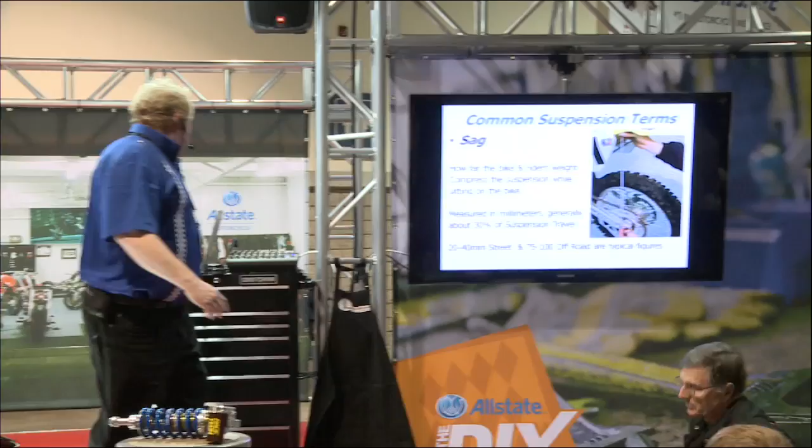Mercy. All right, so I get on the thing, it's got twice as much sag as it wants. How do I adjust it? Sag is tuned using what we call preload. Now, preload is the force we're putting on the spring. In other words, how much are we squeezing the spring?

Now, shock absorbers will have some sort of easily accessible external preload adjustment. A high-performance shock absorber like this typically has a threaded collar, so I can make very small, fine adjustments. A lot of your street bikes will have a ramped collar that has a little cam-type mechanism with anywhere from 3 to 7 notches. Click, click, click. A little easier to do, but a much more coarse adjustment.

What you're going to find is pretty much every motorcycle made is going to have a preload adjustment, even a little 250cc commuter bike. So why would they give a little basic bike like that adjustment? You got to think about where the weight is. Where's the rider sit? Well, towards the back of the bike, middle of the rear. Where are passengers, loads, and anything else you add to this bike going to go? Saddlebags, duffel bags, rider on the back. At or behind the rear axle, a lot of leverage going on here. So I have to have provision to adjust that on pretty much any kind of bike.

Now, forks are a little bit tougher. A fork may or may not have an external adjuster. Your sport bike forks and some of your sport touring bikes will have some sort of knob or nut up here to turn to tension the spring inside there, but most don't, like this example here. And I'll show you a picture of this later on, but if I don't have an external way to tune preload, I have to take the cap off and alter the length of a spacer inside here or add one to it. Sometimes it's just sliding a few washers inside there, sometimes it's cutting a piece of aluminum or PVC pipe to set that distance inside there.

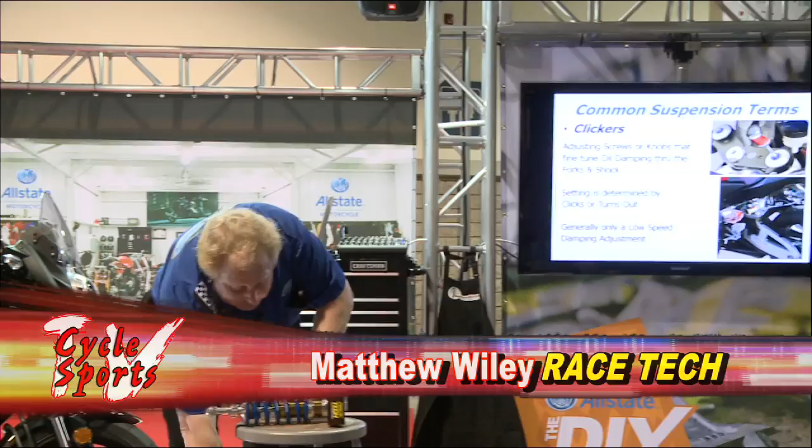If we want to adjust the damping on our bike, we might have the opportunity to do this by virtue of what we call clickers. Clickers are a term that we've tagged on to external adjusters that may or may not be found on your forks or shocks. So in my first picture there, I got a picture of a fork, and we've got a screwdriver adjusting a little screw on the top middle of the fork. Screws on the top of the forks, rule of thumb, are for a rebound damping adjustment. So it's controlling how quickly that fork re-extends.

Screws on the bottom of the fork will be somewhere near the axle. Could be on the front or side, sometimes, or even in the bottom, like this one is, a little screw on the bottom there. And if you got a Ducati, a lot of times they're in the bottom, and Ducati put a little hole in the axle so you get a screwdriver up in here that the guy at the shop forgot to line up. Be aware of that. Okay, so adjusters at the top, rebound, adjusters at the bottom, compression. Remember, the stiffer the spring is, the more energy it's going to store and release, and the more damping I potentially need to control it.

Now, this particular fork picture, this example has an external preload adjuster. The blue nut underneath that screw, you put a wrench on that and crank it down, and there's a threaded mechanism there that pushes on the spring to adjust the preload. Now, shock absorbers, we have the same basic adjusters, but just to make sure you're aggravated, intimidated, and somewhat pissed off, they're backwards. On a shock absorber, the adjuster at the bottom will be the rebound damping adjuster, and the adjusters at the top will be compression.

And you're saying, well, that's fine, Matt, but how do I know which is top and bottom on my shock? Okay, if the shock has a reservoir like this one does, the reservoir will be at the top. But not all shocks have reservoirs, a lot of them don't. If there is no reservoir present, the body of the shock absorber is considered the top, and the shaft is considered the bottom. Now, I bring this up because shocks can be mounted upside down. This particular example was a Race Tech shock for a Honda ST1100, big touring bike. And for ease of access, and because we've added a reservoir that the stock shock doesn't have, we mount this particular shock upside down. So you need to be aware of the orientation of it.

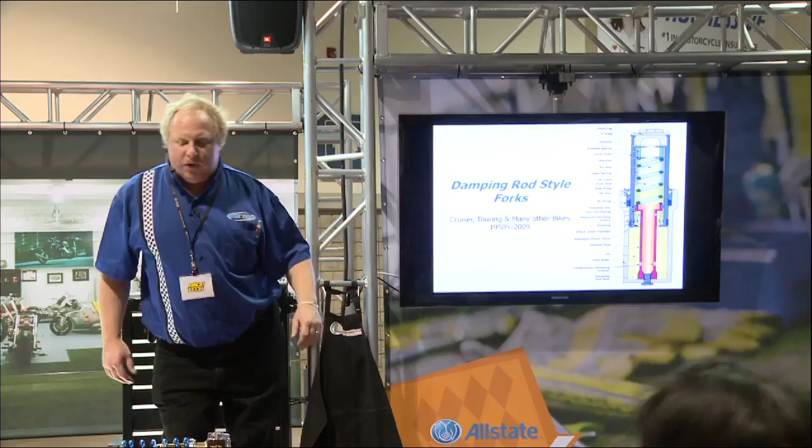Now, how do these things actually work? What's going on inside the suspension when it's working, when I hit a bump? What I have pictured here for you is a cutaway view of what we call a damping rod fork. And that's what I've been carrying around up here with me. Damping rod forks are very, very common. They've been around forever, like since the 50s, but they're very common today. A lot of trail bikes, a lot of cruiser bikes, even some of the touring bikes have them.

We call it a damping rod fork because the red rod at the bottom here is going to control the oil flow through these holes at the bottom called compression holes. I'll show you how that works. The green stripe is my spring. So imagine a spring cut in half. That's why I got the little stripes here. Notice there's my preload spacer in between the fork cap and the spring, setting a preload. The yellow gold area here is oil, and the gray area above it is air.

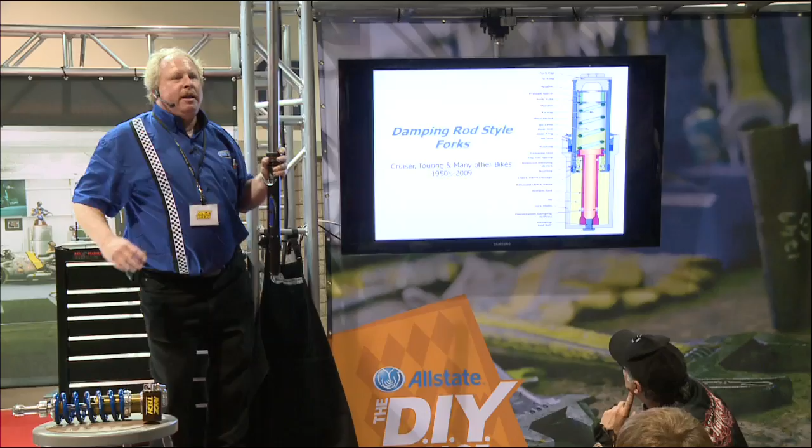So it's critical. I got to leave an airspace inside this fork. Reason being, oil is incompressible. Air is compressible. So when I hit a bump and this thing compresses, the chrome tube is going down into the slider. It's taking up space. Oil's got to move to allow for that, and if I don't leave adequate airspace, I'll have problems. Also, just a little interesting note for you, air is compressible. It's called Boyle's Law. Google it later on, it's kind of interesting. But the airspace we leave is actually a tuning variable that you can use to your advantage.

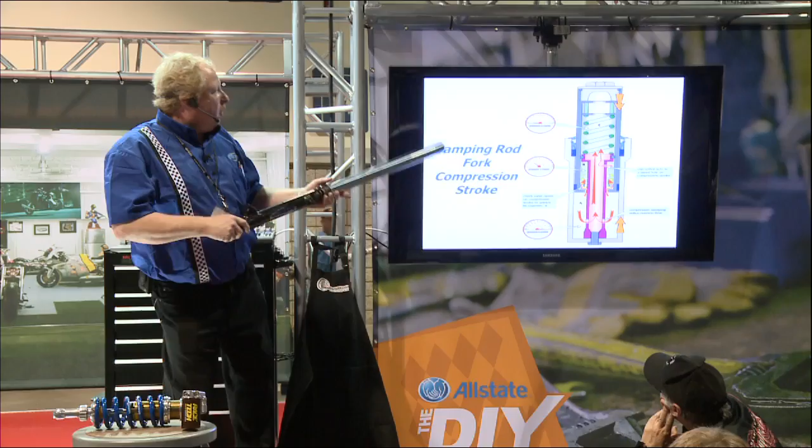So what happens when the suspension works? When I hit a bump, slider's moving up, the fork inside's getting smaller, the oil is being forced through the large compression holes at the bottom of the damping rod into the top of the fork. There is some oil moving through this small hole at the top, but that's not really having any effect. It's just moving it.

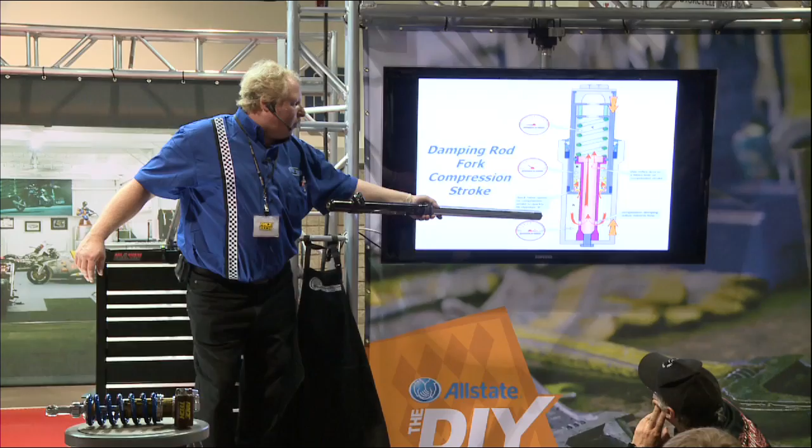So these holes at the bottom of the damping rod are what's controlling our oil flow when we hit a bump. After the bump, and it's re-extending, the oil is backflowing through those compression holes at the bottom, but there's no real damping control going on here. It's just a pathway for the oil to return.

There's a small check valve at the bottom of the chrome tube here that closes. And that, in conjunction with this little blue sealing ring on top of the damping rod, seals this chamber in the middle. And so the small hole at the top of the damping rod is your rebound damping control. Notice how that plays into where our clicker adjusters were. Compression at the bottom, rebound at the top. All right? So that's it.

Real simple design, very easy to work on, inexpensive to manufacture, but it's kind of limited because my control was done by holes. Certain number, 2, 4, 6, whatever the manufacturer put there, a certain size, never changes, does it? But wait a minute, don't bumps come in all different sizes? Yeah, kind of a problem, right?

What happens? Well, typically, if I hit a small bump, the fork isn't moving very fast, and the oil flows too quickly through the holes, and I get a vague, mushy, squishy kind of a feeling, not much damping. But when I hit a big bump, and it's got to move real far, real fast, now the holes are too small, the oil can't flow quickly enough, and I get momentary fluid lock. That's your harshness, that's the hit, the jar that you feel through the front end when you go over a bump.

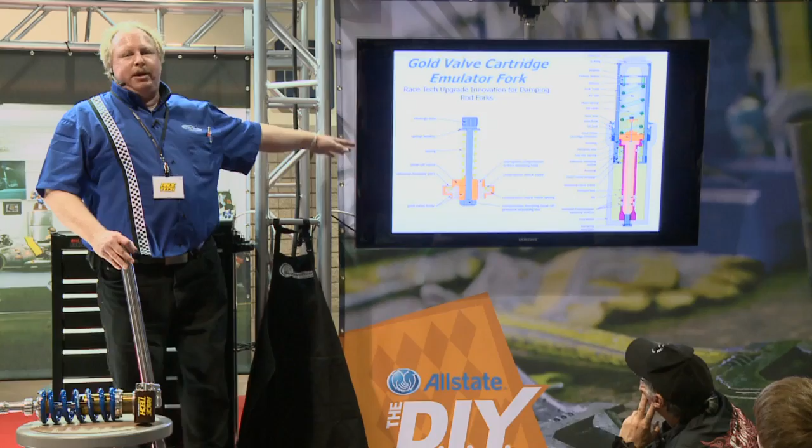Wouldn't it be really cool if those holes automatically got bigger or smaller based on the size of the bump I hit? That'd be about perfect, wouldn't it? Pretty much solve my problems. We have a product we call the Cartridge Emulator at Race Tech. We call it the Cartridge Emulator because we're trying to emulate the damping characteristics of a more sophisticated cartridge fork I'll show you next. But this simple device is a check valve.

It sits on top of the damping rod. The fork spring holds it in place. We drill out the compression holes at the bottom of the damping rod. We add some and make the ones that are there bigger so they no longer have any effect on oil. It's just a pathway. This is a dual stage device. There's a small bypass hole or series of holes at the top and a spring-loaded valve.

So the way it works, when I hit a bump, the oil flows through these small bypass ports at the top, and we control the size and number. I can run 2 or 4 of them, and I can change the size of the holes. So now I got a small hole for a small bump. When I hit a larger bump, the oil pressure blows the spring-loaded valve open as far and fast as it needs to based on the size and shape of the bump.

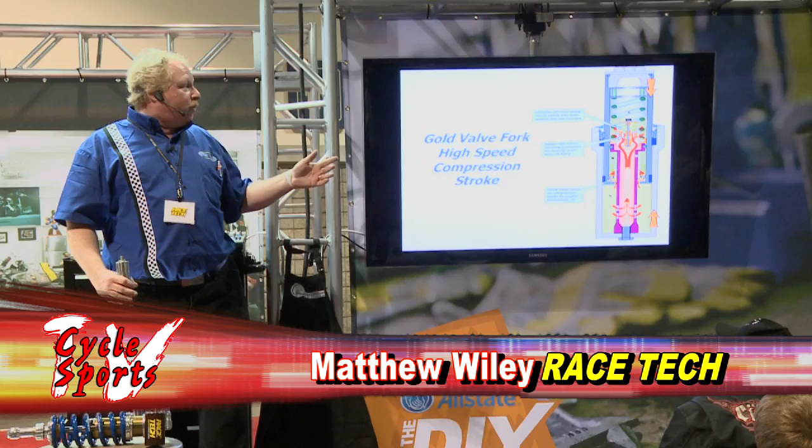I can adjust that by virtue of the spring tension on that valve or by using different springs on the valve. We offer several different springs. So this thing's almost infinitely adjustable. So what kind of ride are you looking for? What kind of bike is it? It can be set up to deal with it and easily adjusted afterwards by simply taking the valve out through the top of the fork, twisting that screw, put it back in there. Not that hard, not that long.

So took my single stage damping to a dual stage damping and made it adjustable. I have also now separated compression and rebound damping from each other. So if I need to use a different oil viscosity to deal with my spring rate, I can tune a Gold Valve to adjust it without making the fork too stiff. All right. The rebound stroke works exactly like it worked before. We didn't make any change there, and we're using the oil viscosity to control the rebound. So the whole exercise of the Gold Valve Emulator is we're trying to give you the same quality and type of damping as what's found in a cartridge fork.

Now, cartridge forks are more modern design. This is what you're going to find on most of your sport bikes, a lot of your sport touring bikes, a variation of this on motocross bikes. And they come in a couple different styles. Now, what I have pictured here is what we call a conventional fork. At Race Tech, we refer to a conventional fork as one with a chrome tube at top, and an inverted fork or upside down fork, like on the Versys here, with the chrome tube at the bottom. Now, regardless of whether it's conventional or inverted, it's just like people. The insides are all the same.

So we all look different on the outside. We all got the same guts, right? It all works the same way. You got it. I can show you the cartridge damper mechanisms from two forks. You couldn't tell them apart. They look just the same. They work just the same.

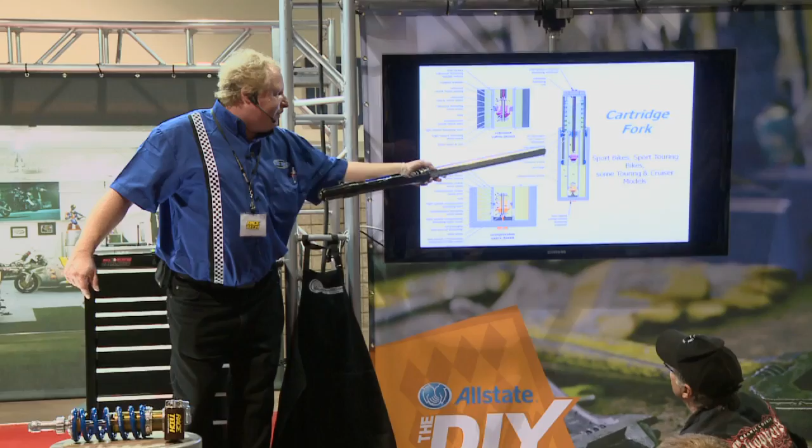Now look how much more sophisticated this is than that damping rod fork. You know, pretty fancy looking stuff here. This is a detail of the compression unit at the bottom and the rebound unit at the top. It's attached to the fork cap via this rod. So again, compression on the bottom, rebound on the top. And this setup gives us that variable size hole we're looking for. So this is just a close-up of those two valve mechanisms right beside each other so you can see the oil moving through them.

So what I have here is a small bump. I'm hitting a small bump on compression. What's happening? Well, on the rebound valve, there's nothing happening. Oil's bypassing it through this little check valve. No damping, just a bypass. The control is through the compression valve through the middle, the small passageway. And this example is using the clicker adjuster. So if you wondered how those clickers worked, well, look at it. You can look at this one and see it a little bit more clearly.

It's what we call a tapered needle. Just about exactly like the fuel mixture screw on a carburetor. So what happens? It's tapered, so when you're running it inwards, it's making the opening smaller. When you back it outwards, it's making the hole bigger. And that's how that's working. Now you're saying to yourself, well, that's cool, Matt, but mine doesn't have any clickers on it. That's okay. It works the same way. We just can't fine-tune that adjustment.

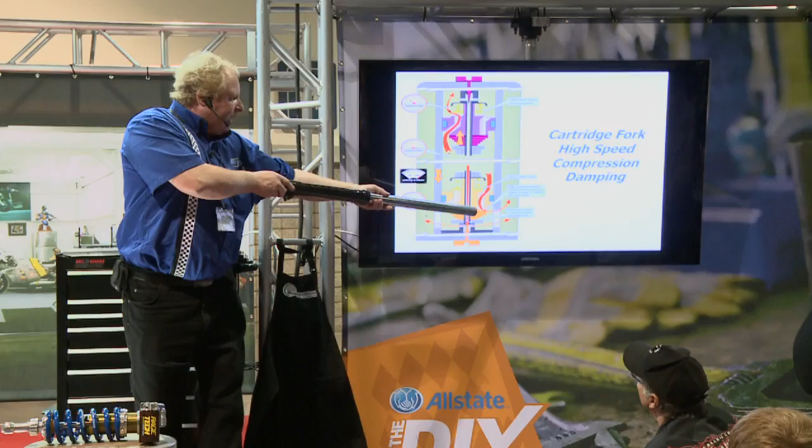When I hit a larger bump, yes, oil is still flowing through the middle passageway as before, but now it's moving to this port on the side and bending these little washer things open here. These washers are referred to as shims. They're wafer-thin spring steel designed to flex back and forth over and over again. They come in different thicknesses. They come in different diameters. The way we stack them up on top of each other is going to control the opening and closing characteristics of this valve, and that's what we call your valving.

So if one of your riding buddies has said, I had my forks revalved, what he's referring to is the suspension tuner changed the size, number, orientation, or whatever of these valve shims to change the way the valve opens and closes to suit that rider's style. Now, a good tuner won't just change the shims because there are some inherent limitations in the stock mechanism from the factory. Ideally, they'll use a Race Tech Gold Valve or other similar product on the market, and change the entire valve mechanism to give you ultimate flexibility.

So what do we have here? Well, we have a two-stage variable-sized hole, don't we? Small hole for small bumps, large hole for large bumps, and it's easily adjustable. The re-extension or rebound after the bump is working pretty much the same way. The whole thing just flip-flops to the other valve. So it's everything I described to you, it's just changed. Now nothing's happening here, and the same process has moved up to the rebound valve. So the beauty of this system is that I have separated rebound and compression damping from each other. They're independently tunable and adjustable, and I have a variable sized hole for my situation. So that's your basics on fork operation.

Once you understand forks, shocks are pretty easy. Now there are a number of different shock absorber designs, and for the most part they work the same. The first picture I have here is called a twin tube shock absorber. These have been around for a while, since the 70s. They're still in use a little bit today. And you look at that, and doesn't that look almost exactly like the cartridge fork we just discussed? You would be correct. It works exactly like the cartridge fork we just discussed. Same way. Matter of fact, that's where the cartridge fork design originated.

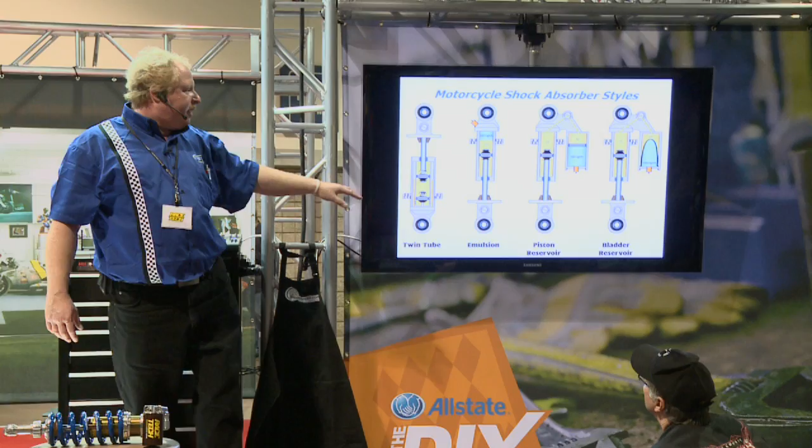Now, these other style shock absorbers I have here are called de Carbon style shock absorbers. And note, they only have one damper. So the primary difference here is instead of two dampers, each that only works in one direction, I now have one damper, and it works in two directions by the same process. The first one here I call an emulsion shock, because the oil and the nitrogen gas are mixed together. My reservoir style shocks, I'm separating the nitrogen and the oil from each other, either by virtue of a metal piston or a rubber bladder.

Now, just like my fork, where I'd leave some airspace in there, I gotta have a space inside the component, because when I hit a bump, the shaft is gonna go inside the body, it's gonna take up space, okay? When that happens, it either squeezes the oil and the nitrogen here, or in the case of the reservoir shocks, it moves the piston down against the nitrogen, or squeezes the bladder like a balloon. Now, the nitrogen is under very high pressure, anywhere from 100 to 300 pounds per square inch, depending on the application.

We need a lot of pressure inside the shock to keep it from what we call cavitating, getting air bubbles in it. But does anybody understand or know why it is we're using nitrogen in a shock absorber as opposed to air? Anybody know?

No! Air's free. We can charge you for nitrogen, buddy. It's America.

Seriously. There's legitimate reasons for using nitrogen. It is more temperature stable. And hey folks, a motocross shock or road racing, it gets hot. You take a motocross bike, come off a track, put your hand against the shock absorber, you'll get a 3rd-degree burn. It gets way hot. Now forks don't get very hot, so you don't have a nitrogen issue in forks like you do shocks. Additionally, nitrogen is drier. In other words, it doesn't absorb moisture, so you don't get corrosion issues. And that's the reason we use nitrogen.

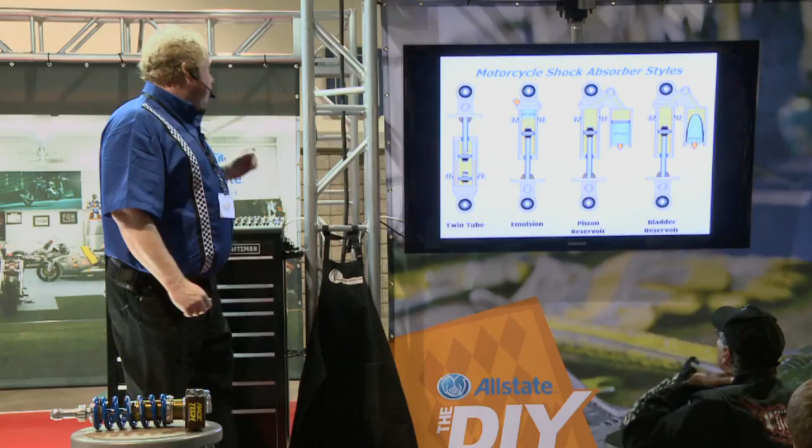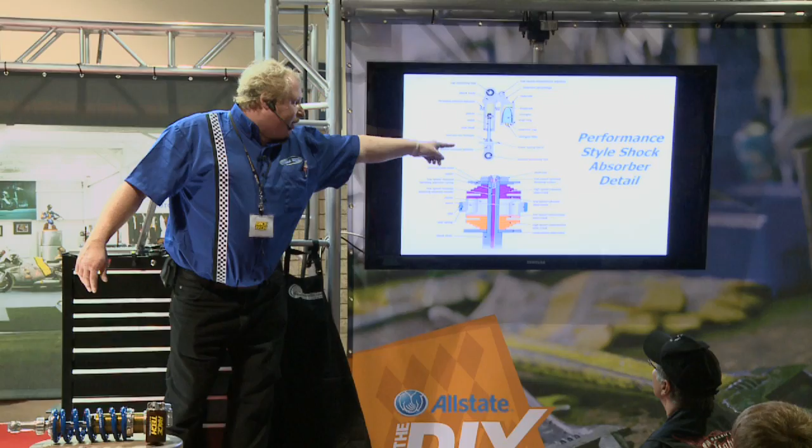This is a close-up detail of the damper mechanism. Works exactly like I described to you before. I just literally have one damper that flows in 2 directions as opposed to 2 dampers flowing in one. It's a call out of your major parts on the shock absorber. So note the adjuster positions. Low speed adjuster for rebound on the bottom. Compression damping adjuster on the top of the shock. But let's back up here just for a second and watch out. Oops, wrong way. This one's upside down, isn't it? Note the orientation, shock body, shaft. So this is actually a rebound damping adjuster here. So be careful, make sure you know which way the shock is pointing.